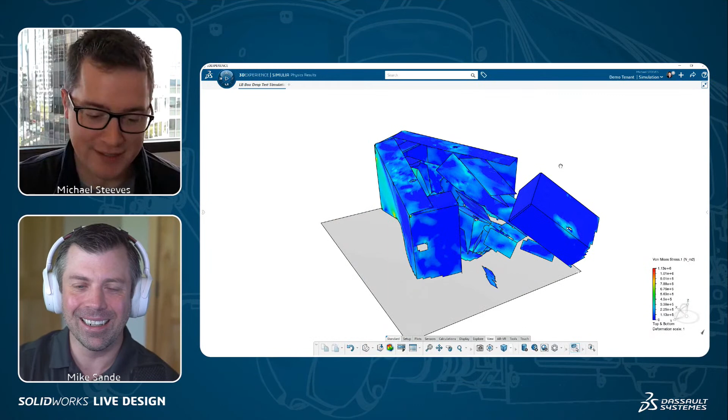I've got a little background on this one, but what are we looking at here? This looks like you do have some background, and I wanted to show this, just gonna play this. This is one of those things where it's like you set up something in simulation, you run it, and you're like, I didn't even know we could do that. I don't even know what's going on here. This is like, what is this, man.

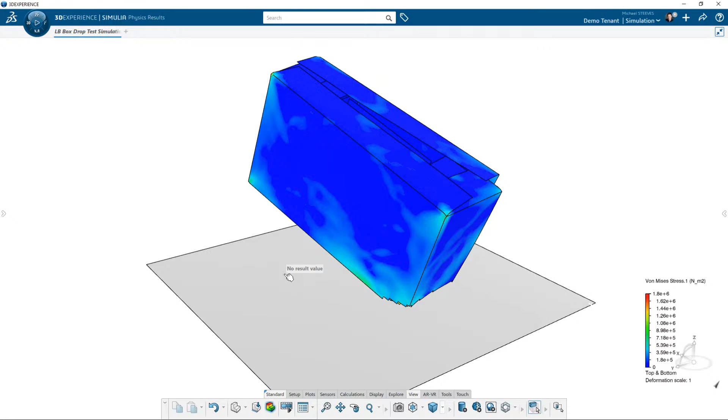Maybe we should rewind a little bit and unbox kind of what's going on here, because it is, it kind of looks like a box. It is a box. Maybe you saw in the thumbnail for this session, we've been working on this project, Lid Boss. I know, Mike, you and I have been working a lot on it. And as we start to get ready to tell that story, I thought, what a better opportunity than to come on to live design and do that technical deep dive and get into some of the underlying features, how we did what we did, what's displayed in like a 9-minute video for this advanced simulation. So that's kind of what I wanted to do with you today: take a look at having a SolidWorks model and getting it to the 3D Experience platform, do some real world simulation. What does that set up? What do those materials look like? Because it's a cardboard box.

Ooh, cardboard material properties, that's going to be interesting. I've had a lot of people ask about that over the years. And change happens, so design change. How do we have to recreate the simulation from scratch? Those are the kind of things that I'm hoping to talk about today.

Cool. Let's go back real quick and touch a little bit on the background of the product, because we might as well get the audience up to speed. So as Michael mentioned, over the last few months, us two and a few others here at Dassault at SolidWorks have been working with a customer, actually it's Center for Advanced Design. You've probably seen them on the splash screen, like the snowmobile was a big one. That one's been on a splash screen for like the last 5-6 releases. That's one of the designs that they did. They're out of my area. I live in Minnesota, just outside the west side of the Twin Cities, about a 45 minute drive. And we engaged with these guys because they actually spun off and created a new company called Lid Boss.

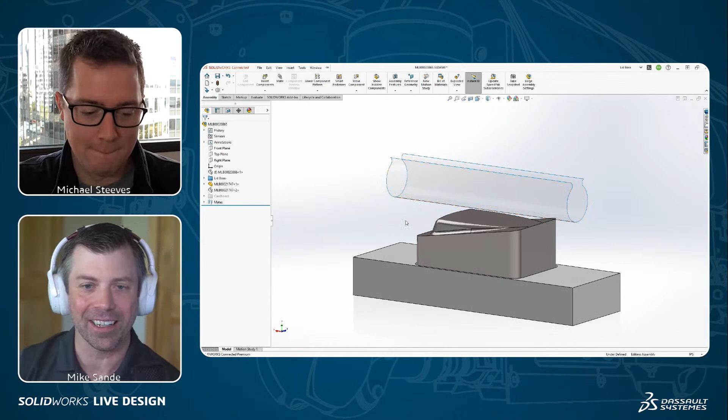So just kind of that a surface representing that outer shell of the LidBoss model, and the gravity tube. So that's the gravity tube, the lids go into that thing. It rotates 90 degrees, goes into the top, dispenses those lids. But yeah, this was the kind of initial packaging layout, if you will.

And so right now, I guess all these, to get this to a point where we're ready to run an advanced simulation, and one of the things when we talk about advanced, it's like, well, okay, in this case, drop test. A lot of contact, a lot of nonlinearities happening in a very short amount of time. So that's where, okay, Abaqus comes to mind. And Abaqus is actually the technology that we're using on the 3D Experience platform to do these advanced types of analyses.

So kind of one of the first steps that we can do is connect SolidWorks to the platform, and I'm sure a lot of you out there are probably using SolidWorks desktop, and you can easily connect it to the platform and leverage the wide range of roles and applications. So right now these files are local, but integrated into SolidWorks. We have the platform, and we can do that save.

So Michael, real quick, I want to point out, because I always thought this was cool, is doing packaging design in SolidWorks. And I don't know if there's anyone in the chat that's done this, but you can actually use the sheet metal functionality to create your flat pattern, right? So like that's what they did here, is go through, create the structure around the LidBoss. You have that overall box structure, and I've seen really cool examples where there's an AE that did like a full mask, an Iron Man mask.

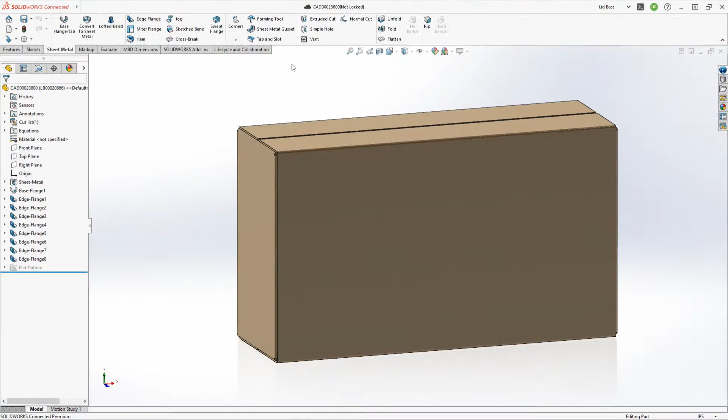Yeah, definitely. I mean, take a look here, because using sheet metal inside SolidWorks, it's in every version. We can generate that flat pattern, and there it is, right there for our box. Because yeah, that's definitely an interesting concept.

And now I'm inspired by what Jeremy did a presentation on live design. Oh, that's right. Yeah. Was it last year or 2 years ago? Man, these live designs are going by fast. Yeah, we have now built up quite a big library.

But Jeremy did a packaging presentation, showcasing how you can use the SolidWorks sheet metal features to do packaging design. Yeah, super cool.

So there it is. And yeah, with a couple clicks, it's right there. It's saved right to the platform. So what does that really mean? Well, instead of stored locally on my machine, it's now on the cloud. So I could go to another machine, open it from there. In addition to that, I can open it in a variety of other applications.

So like the simulation guys that you and I are, Mike, we have access to a variety of simulation tools. If it's structural analysis, fluids, plastic injection molding, and more. Electromagnetics is one. I think there's the story of the e-bike that has recently come out too that showcases it.

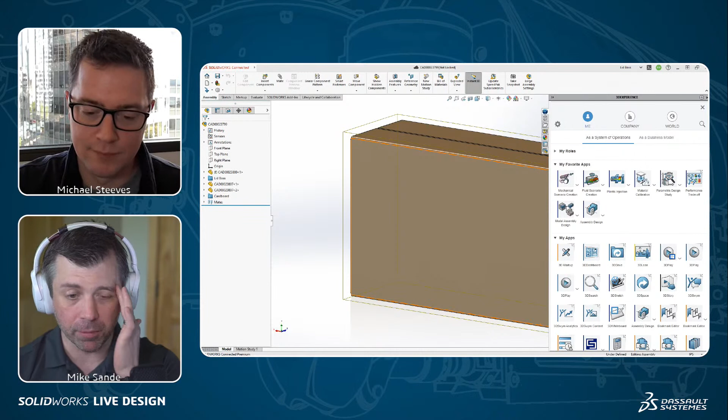Yeah, there's a lot here, and Michael, my background, I used to teach the simulation class for SolidWorks, so for the viewers out there who might be interested, we know we have SolidWorks Simulation available today in desktop. Why would I go up to use these Abaqus solvers? What's the big reason to jump to the next level? Yeah, so there's many reasons.

Just talking about the power of the cloud for the moment, with this, the level of collaboration we have is improved. I remember before I got into my first job in industry, I was shadowing one of the design engineers at one of the local aerospace companies here. I'm in Bellevue, Washington, at the moment, just outside Seattle. A lot of aerospace, as you might imagine. I was shadowing one of the engineers there, doing a design change based off of some simulation results.

And the reference he was using was just a couple pieces of printed out paper, a simulation report. I couldn't interpret it. It was my first glance at FEA results. I'm like, how do you know what to do and where and why? And so he had to do a lot of interpretation from these static images. So that's where this level of collaboration, leveraging the cloud, is definitely improved.

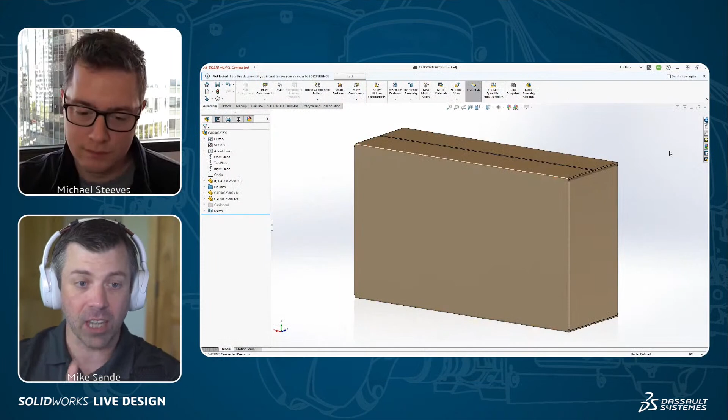All right, cool, man. Well, I'm excited to see the process here. You got it in SolidWorks CAD, right? We've got the design. The design's done here. We talked about that. We got the cardboard. We're leveraging that simplified assembly for those that aren't aware of some of the process in simulation.

But you try to find areas that you can simplify it. For the lid boss, we didn't need all the nitty-gritty detail. We just needed that mass, basically, and some of the geometry to reference. And now you're sending it up to the cloud? That's right. So now it's a part of the platform. So now I can easily access that data for the plethora of applications that are on there.

So actually, one thing that we just did here, let me just update this, because when I saved it up, I actually saved a couple extra components there. So I need to make a little design change and update it here. But one of the important things, especially for SolidWorks users, if you are taking your CAD model to any other analysis package: if it's SolidWorks Simulation, of course, it's integrated right into SolidWorks. But if you're going to Abaqus or something else, sometimes you have to do an import process.

Not here. We're going to a separate application, however, since it's all on a unified platform, we just open it up and there it is. So it's super easy to open up in these other applications. I guess that's one of the other benefits of the platform: there's no conversion that you're having to do as a user. Yeah. So me in Minnesota, you in Bellevue, Washington, I could be working in the design real time, and you could just start cranking on a simulation on your end. No email, no nothing, huh?

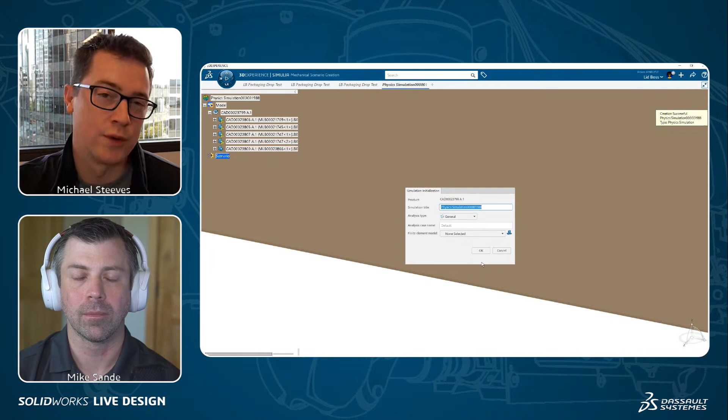That's right. That's awesome. You think of social media or other collaboration tools where you can @mention people, call them out on that platform. It does the same thing here. So, yeah, and it's integrated with SolidWorks. So launching it right from there gets you going. As you can see here, I've got a couple revisions that we'll be taking a look at. And I should clarify, the simulation tools that we're running here are locally installed, just like SolidWorks. I mentioned being able to solve on the cloud. Of course, you can solve locally. But again, if we take a look here, there's the same SolidWorks geometry right in there.

So one of the first questions is, how can I create, like we're doing a drop test here. I think we're talking to Mark and Jesse at Lid Boss. If you're going to ship your product around the world, how are you going to validate that packaging? Well, you could send it out to some of these independent packaging validation places that perform these batteries of tests. But the question is, how can I make the initial design better before we get to production? Same question applies to packaging.

Yeah, so a little backstory on that: once they had their packaging pretty well set, they paid a good chunk of money to get this thing shipped all over the place, to and from East and West Coast, up and around and down. So you've got not days, but weeks and weeks of physical data of this thing being shipped around via different shipping methods to get that data back to then analyze it. So a lot of money and especially a lot of time. And remember, COVID just happened. They released their product. They didn't really have that. So being able to validate it virtually, there's a big benefit there.

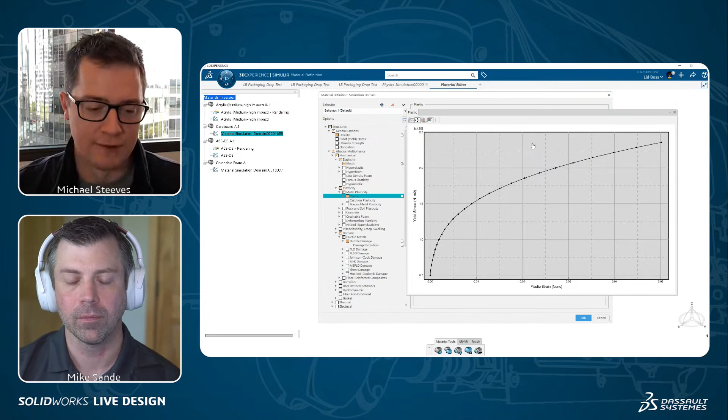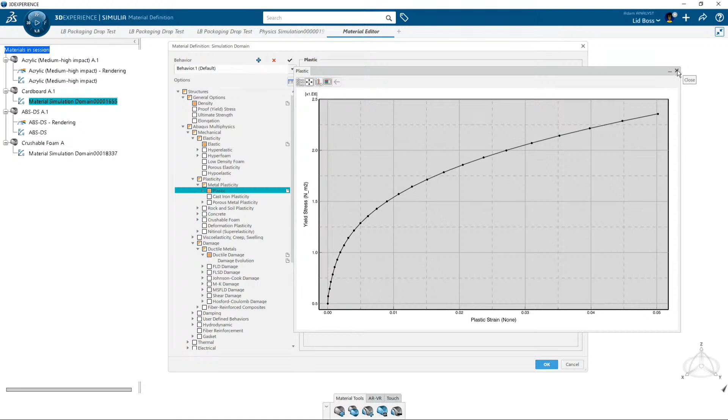So what I've done here is I do have a kind of simplified material model to represent that cardboard in the two directions. And as you can see here, we're representing that nonlinearity of the plasticity of the cardboard. There's a ton of different material models in here. I know some of the capabilities in the desktop stuff, but yes, like hyperfoam, wow.

Yeah, so you can see, of creating a material definition here, on the left-hand side there's a lot of different things that we can do inside structures and the multiphysics of Abaqus. And the ones that have that little orange dot, those are the ones that we're using. So of course we need properties like density. Here's our elastic property here for our different directions of the material.

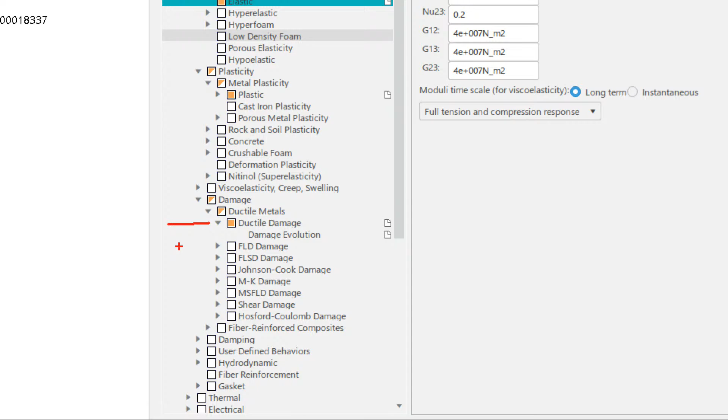There's that plasticity, and here's our culprit here of how we were able to have that first simulation we looked at blow apart, disconnect, elements are dying: it's damage. Wow. So we have some damage enabled here to account for that element death. So in Abaqus, you can actually figure out when stuff completely fails. Is that accurate to say? Right. So we have a fracture strain that's defined here to account for that.

Yeah. And this is something where you do physical testing, you do some correlation with the data to account for that and bring in these different material models. Again, like what I mentioned here, this one's a simplified model, but one cardboard material doesn't apply to the various types of corrugated cardboard that we were talking about a minute ago.

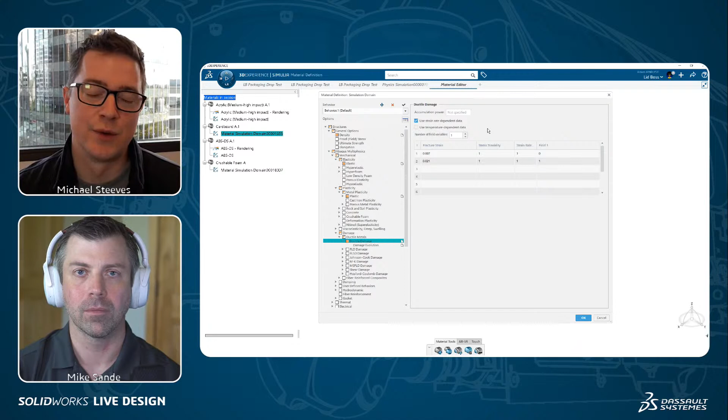So yeah, that's where you could have multiple materials, and you could toggle between. That's part of the design process. Well, you could change the geometry, but what about the material? So you could switch between different cardboards to see which one is going to work best in your case. Really cool. Really cool.

Yeah, so for those in the audience that are familiar with the desktop simulation, in just static analysis where your stress-strain is linear, so you hear about linear statics, we're really analyzing the deformation that happens in that line. Outside of that line becomes a nonlinear type of deformation. There's your stress-strain curve right there. And SolidWorks can do that. There's a nonlinear solver there, but it's a little bit more limited.

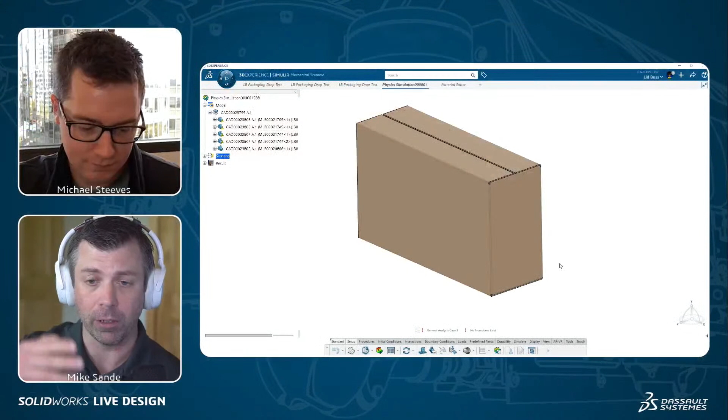Once you get into these, you can see what Michael's got up here, all these different ways we can validate different materials. And we all know, in today's technology, we're constantly creating new materials or new ways to manufacture materials. That adds a lot of complexity. This is where having the power of the Abaqus solver, you can really fine tune and create those different materials and solve all the way through into failure. So that's huge to a sim geek, that material model is really powerful.

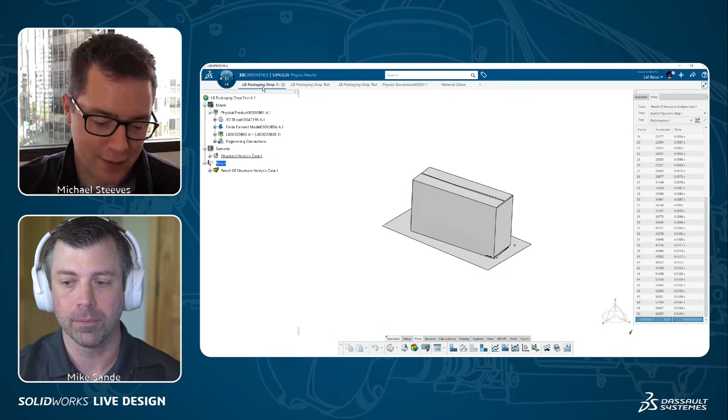So maybe I'm going to fast forward here a little bit and take a look at one that I have set up here for this first iteration. So one question that does come up is the different types of scenarios or procedures that you can create, and this capability keeps expanding every release. So down here, if we look at the bottom, when we set up an analysis case, we have our procedures, and we can do things like you mentioned in SolidWorks Simulation and desktop. We can do linear statics.

We can do buckling. One thing that's unique here is we can do the Riks buckling analysis step. We can do different static perturbations. Then we get into our dynamics, so implicit dynamics, which is the type of approach we use for our nonlinear capabilities in SolidWorks Simulation. But then we get into the explicit dynamics, and we get a little bit of explicit in SolidWorks Simulation with the drop test study.

You think, oh, maybe that's where we can accomplish a situation like this. But again, once we get into kind of the more advanced materials, that's where we would really differentiate here using these roles here on the platform.

Hey, Michael, we got a question. I don't know if you can answer this one. I know you worked with the Simulia team on the material model, but Ken's got a question. Are you using ECT or Mullen on your test for the corrugated? Ooh, I don't know that off the top of my head. We'll come back to that one.

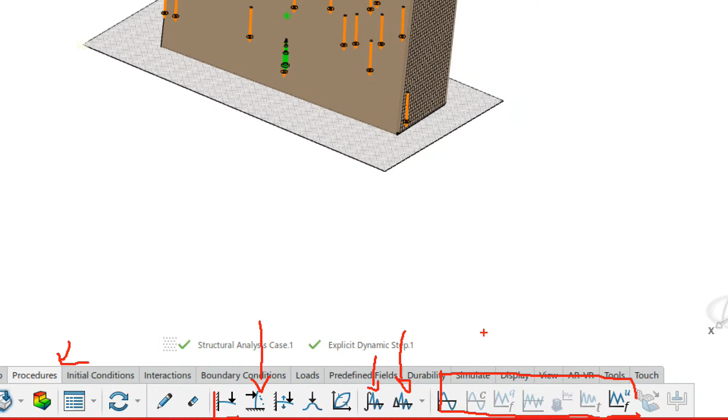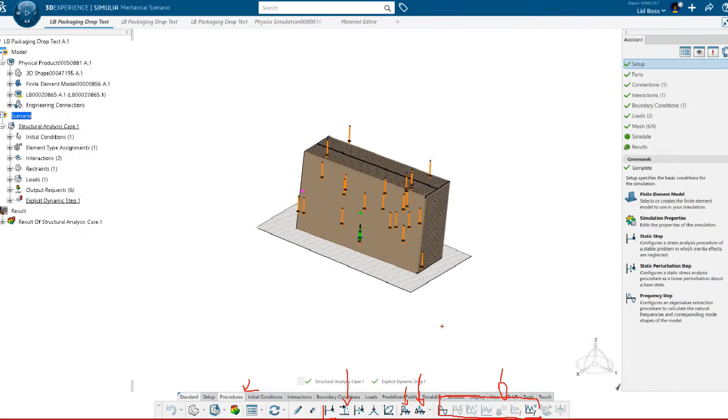Right, so if you're braking on your car and you've got that brake squeal, there's harmonics that are going on there, but there's also contact that's happening. So being able to quickly analyze that type of phenomena is capable with the complex frequency. And most recently added here is our response spectrum analysis. Cool. So the types of studies that we're doing here keep on expanding. And of course, if there isn't something there now, let us know. We'd be happy to work on getting it in there.

So it all goes back to, we all know failure happens in engineering, and I love the saying, fail early, fail often, right? We want to try to virtualize those failures before it goes into production, before it goes to market, before you're shipping 100,000 units all over the world, right? And failure is not always just that linear statics failure. It's not always just the metal has yielded. You've got almost a half dozen different ways to look at it.

So keep that in mind as you're designing, what type of physical outside real world conditions are happening to your product when they're in use, and can you virtually validate all the way through beyond just that static failure that we're all pretty well familiarized with. That's really cool. That's a lot of different ways we can analyze.

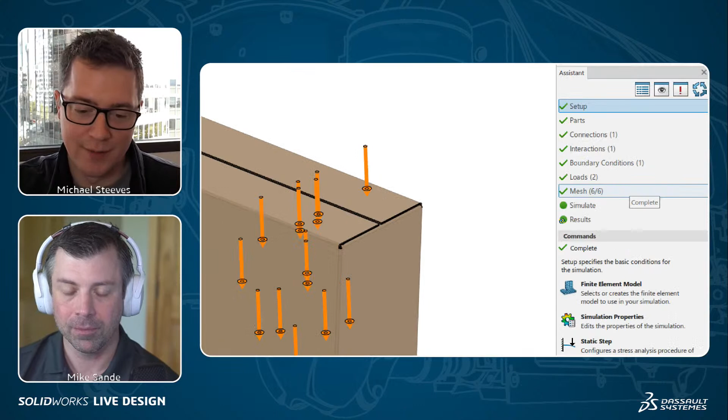So let's talk about the setup a little bit. The setup here wasn't too complex, and actually to help walk along here, we do have an assistant that's built in to walk us through setup, defining the parts, connections, and mesh. Last year when we did our other project, Mike, with the shredder, in that episode of Live Design, we did get into some of the meshing techniques, so I'd invite people to go back and watch that one. I want to talk a little bit more about this explicit study and the setup here.

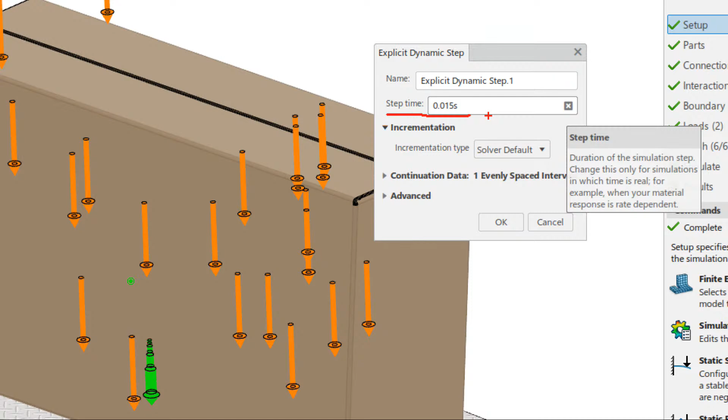So when we define that procedure there at the bottom, we can specify how long we want to solve. And as you can see, it's a small fraction of a second that we're accounting for. So you may think, oh, how do I set this up? Do I have to move the model up above, account for the amount of time it takes to drop down? And the answer is no. As you can see here, the initial condition or the model placement is where that box is about to hit the floor.

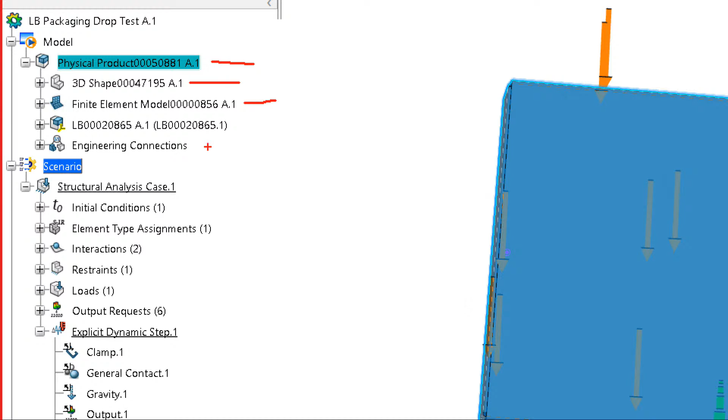And that's actually something where we have access to additional applications. I could set up that geometry right inside SolidWorks, but we didn't. We actually pulled that final package in and inserted it into a new, what we call a new physical product, which is right there. We modeled in a floor. There's our mesh represented there. We'll leave that aside for now. And there's that SolidWorks model. So we're able to combine both SolidWorks and CATIA to generate the geometry and perform the setup.

So a question came in here too on, can we also view, and I know we'll get to results, but view the accurate deformations?

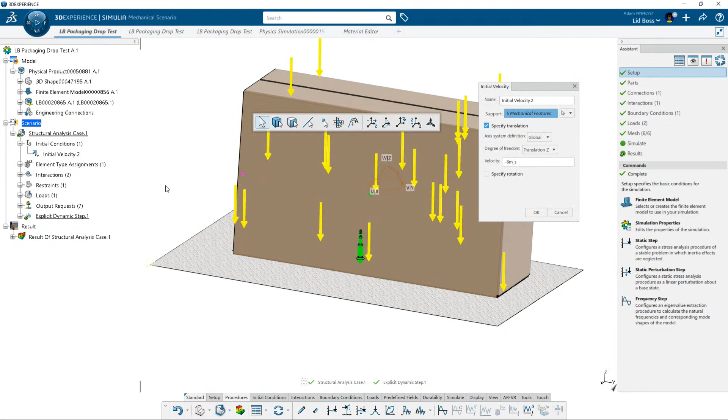Yes. Yeah, let's take a look. We'll come back to that in a little bit, I think. Awesome. Okay. So just to step through here, we have an initial velocity, 6 meters per second, headed down. We have it applied to all those bodies.

For interactions, I've talked about this many times, but when it comes to interactions, we just specify a contact property, like what's the friction that's here. There's plenty of internet memes, especially engineering memes, like when the physics professor tells you to ignore friction, like, oh, the problem's super easy, but it's not realistic. Friction is definitely in the real world, but we apply that with just a property here.

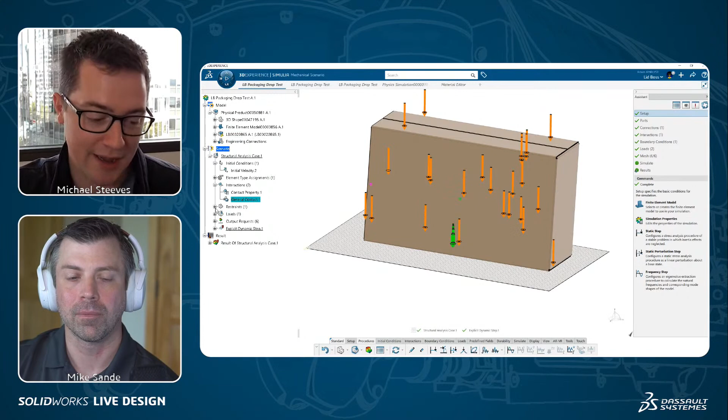You can individually assign it to different regions if necessary, but I have it globally defined here. It's part of a general contact overall. It's applied to all surfaces, so everything that comes in contact is automatically recognized. This is one of the other big benefits of using these roles on the platform compared to other tools: contact detection is amazing and automatic. From here, we have a clamp that's applied to the floor.

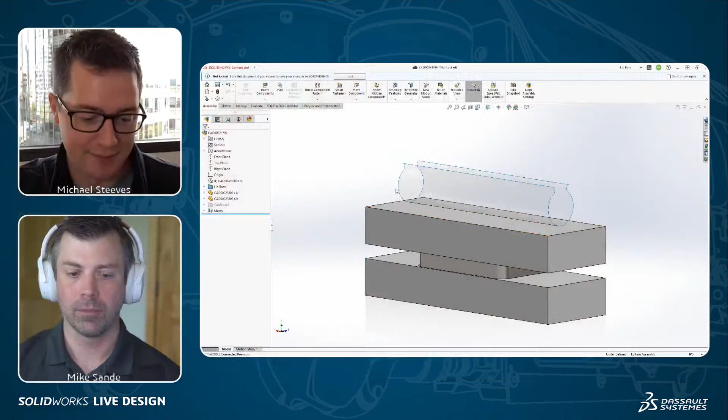Questions coming in. Martin is asking, is this SolidWorks Premium? And the follow-up question is, where are you performing these analyses? I think you may have missed that intro part. So just to refresh on the data workflow here, the process. Yep. So the CAD model is coming from SolidWorks. There's our initial cardboard packaging design.

That is being saved onto 3DEXPERIENCE and then opened in one of our roles, or one of our apps. So this is the Mechanical Scenario app that we're looking at right now, part of the Durability and Mechanics Engineer role, which is a collection of these apps. If we take a look at some of the other tools in here, to create that assembly I was using Assembly Designer, and to do that material definition we talked about earlier, there's that app. Here's our scenario creation. And you can see there's a variety of other tools here to help perform those different tasks to perform the simulation.

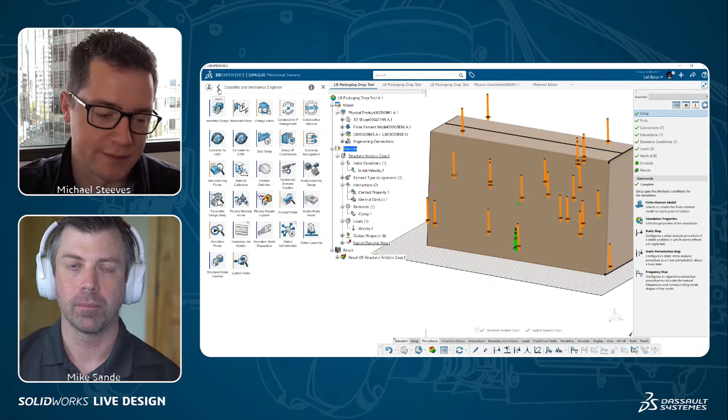And now these apps here, on the platform we offer full cloud-based apps, like you've heard of xDesign or xShape, which are browser-based modeling applications. This one you're working with, though, still has an installation. Is that correct? That's right. Yep. These are what we call native apps. They're installed on your Windows machine.

But one thing with the results, when we do that post-processing, and we can get there in a little bit, is those can be shared and viewed right from your web browser. Cool. Yeah, from your phone, or even integrated right into SolidWorks. So if you share those results back to the designer, you can have those results right in that right-hand pane to help drive those changes that you're going to make in SolidWorks.

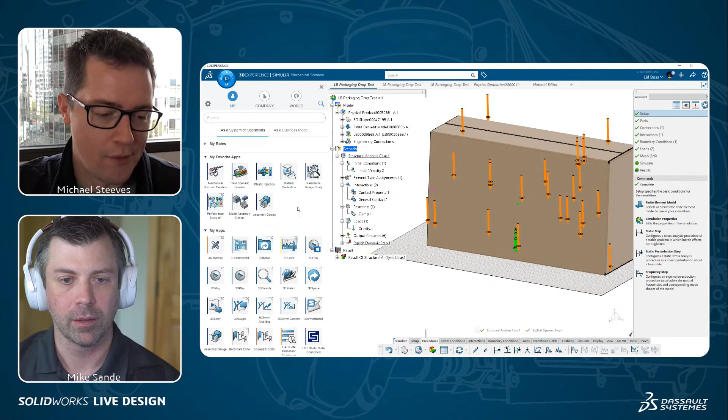All right, so we've talked a little bit about the data on the model side. Now into the scenario, we added some friction, right? We added friction. Yep. We added a clamp to hold the floor. We added gravity to everything. And then maybe let's talk about solving a little bit here. When I submit these jobs to solve, you can choose. You can solve it locally on your machine because it is a locally installed client, or you can send it up to the cloud.

Now, what's really powerful about these roles is the capability to solve on the cloud is available to you at no additional cost. So if I'm submitting this job, I can choose however many cores I want, and I've solved this on this laptop here. It's 6 cores. Of course, it's hyper-threaded, but we're solving on the discrete cores, so I can choose up to 6 on this machine. No additional tokens or credits are consumed here, so I can do that locally. Or, as the other option, I can choose to solve it on the cloud.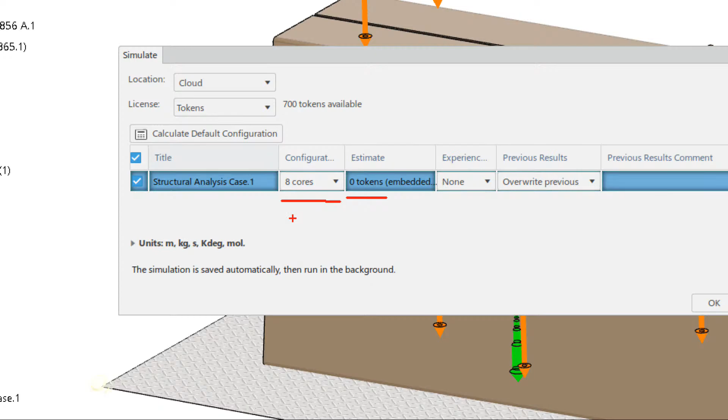And like I mentioned, with the Structural Mechanics Engineer role here, 8 cores is included, so it's not consuming any additional tokens or credits. However, you can purchase additional tokens and credits so that when we're solving on the cloud, we can go up to 18, 36, or even 144 cores. Whoa, that's a big machine. So that's part of the power of the cloud, that high performance computation. So actually, I had this question come up of, why 4, why 8, why 18, why 36? It's like, well, what if I wanted 50? Did I do 50?

So yeah, a couple things there. With 4 and 8, these are the levels that are included. We have different roles available depending on the type of analysis work that you do. Depending on that role, the capability of 4 cores or 8 cores are included. So that's where the 4 and 8 come from.

But from there, the logic behind 18, 36, and 144, it's coming from what we're solving, what type of structural scenarios, what type of fluid scenarios, plastics, etc.

And what development did is found a balance to optimize the best core options, and also, when you run it on the cloud, what cloud resources are you using? Because as you imagine, the cloud isn't free. If you wanted to spin something up on AWS or something, you can pay to use that piece. But when you go consume that resource, you have to say how many processors do I want on that virtual machine, on that cloud machine?

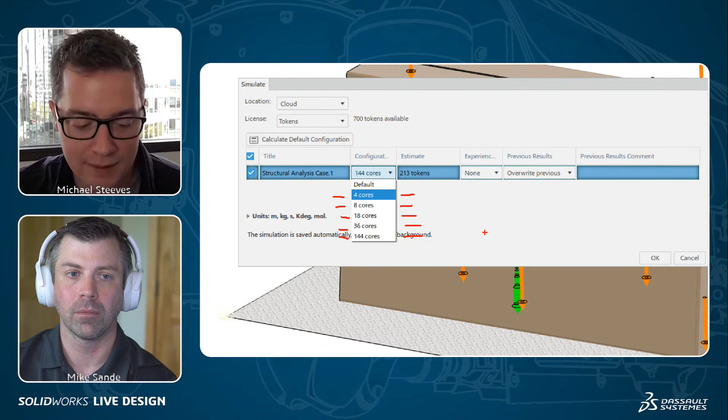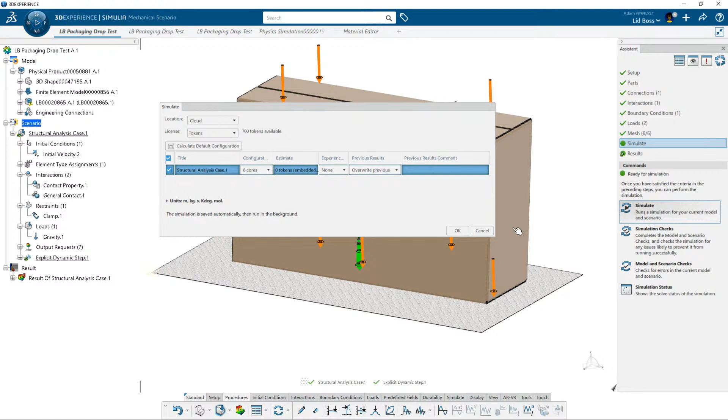And when we submit these jobs, actually solving this study on 144 cores took about 20 minutes to solve, compared to locally. When I ran it on 6 cores locally, it takes about 60 minutes. Okay, which was still not bad at all. That's a lunch, right? It's a lunch, yeah.

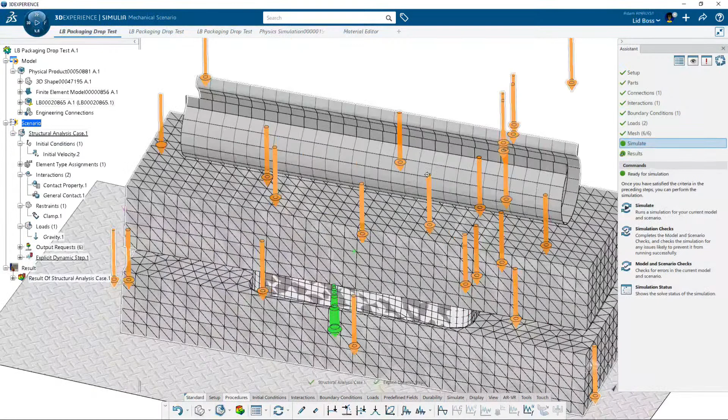And you can think, we did a lot of simplification in this model that we took a look at earlier. We're missing a lot of these smaller features in the model. The entire gravity tube is just simplified with a surface extrusion. But you could throw more geometry, more complexity out there, and leverage the power of the cloud to do it.

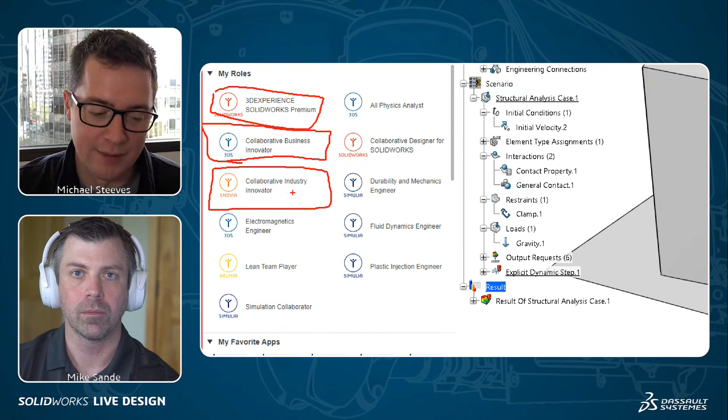So there we go. What we've shown earlier is we've got 3D Experience SolidWorks, that's where we made the model. The other option there is collaborative designer for SolidWorks, that connects SolidWorks desktop to the platform. Here's our collaborative business innovator, so this is where we get our dashboards and more. Once we get into storing cloud data, the SolidWorks data on the cloud, this is where we use one of our prerequisites, collaborative industry innovator.

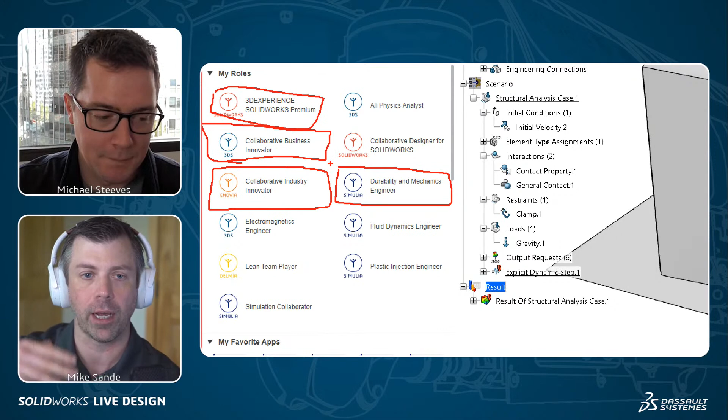So is it included? No, it's an additional role, what we're doing here to set up this simulation. Yeah, so essentially if we were to include it on that basic one, that cost of entry would go up. We really want to make it so if you're doing design work, you have a design role specific to what designers are needing. If you're doing more simulation stuff, you can add that role in as needed. It's going to come with all the apps that you need that Michael showed, like that material definition app becomes available to you, that you don't necessarily need if you're doing more of just design type work.

So when you look at the 3D Experience platform and you look at what you do, whether it's a workflow or an industry that you're working in, we have roles very specifically curated for your work. So you're not getting more than you need, but you can add those on as needed, and they become available to you right away, right through the browser. You can start to launch or install to be able to tackle those challenges.

Another question for you, let us know if you have more questions on that. Will these features be added to the offline SolidWorks program, or is this only accessible on the online service?

I think this gets into looking at what's available today with the desktop simulation tools, and as we kind of level up to the Abaqus type solvers, do you think we'll ever see this? Yeah, these roles that we're showing here, leveraging the power of the cloud, submitting it to run online. This is all part of 3D Experience on cloud.

One thing to keep in mind is the simulation tools available in the desktop apps are really focused and honed in on that early design process, how to make those decisions when you're in that if-then scenario. As you get further down the development cycle and complexity gets more involved, your decisions come a little bit more costly to making a bad or a good one. This is where you're going to want to go into these very powerful solvers that not everyone needs. The desktop simulation tools, we see a need for any designer or engineer to use in that early phase. But as we progress, the answer to the question is we probably won't ever see, and I can't say never, this level of solving in the desktop app, because we have great tools available today for that design aspect of it.

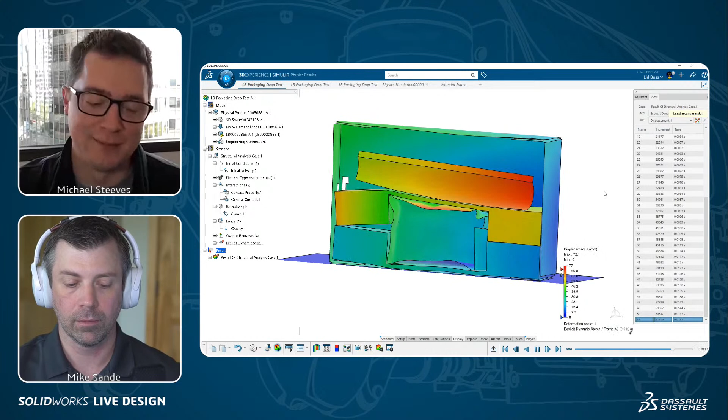But I think for our time today, I'll have to have everyone go to the videos when they're available to watch. Right, pretty pictures, and there's a displacement graph there, but yeah, the accelerometers, you guys have to check out the videos again. That'll be available next Monday, the microsite and emails will be coming through. That's where the good data, the fun stuff to really start to analyze, comes in.

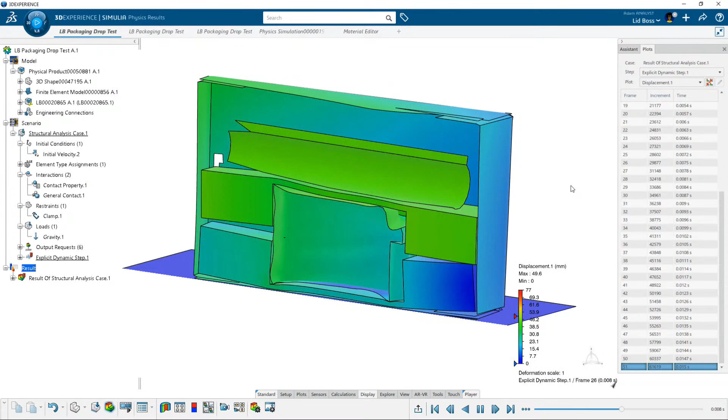I think one thing we see here is, oh well, it could be performing okay. That gravity tube is unconstrained, it's able to move around there a lot. And we did only solve this for the initial collision of what's going on here, but there's so much happening in such a short amount of time. So I think really going back to, okay, let's come up with the initial design, let's do a virtual test and set that up.

And of course, change is bound to happen. I think the story with LidBoss and the change they had to make was they shipped out their initial package to a restaurant, and they opened it up, and what did they see? They saw the styrofoam foam. They saw the foam and said, no go, we can't have foam in the food industry.

Yeah, so the NSF standards, the food and safety standards in packaging. Kind of a fun fact: if you're ever doing packaging design for food, you cannot have foam. It has to be cardboard only and plastic wrap. Plastic they can include in there as well, but no foam.

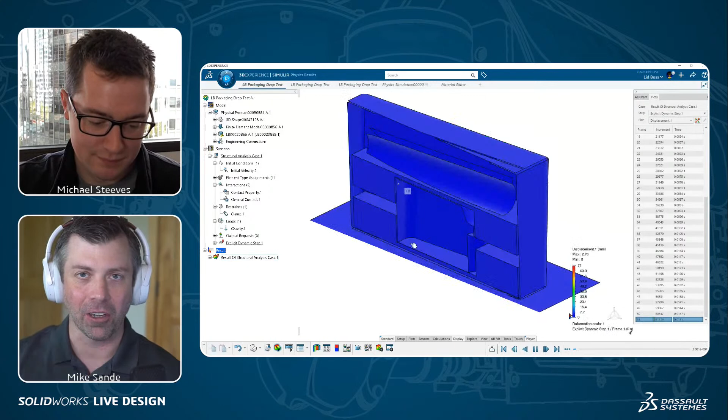Right, so quick change - maybe you've used foam before. What do you think about for impact? Think of a car's bumper, ever take the rear bumper off a car? They have super high density foams in there because foams do an extremely good job at crunching during those impacts. So why wouldn't you want to use foam in a drop test in a box like this? But you can't, that's why.

So they had to resort to an all cardboard design. Maybe we'll use that one we created earlier. This wasn't fully set up by any means, but it does show the foundations. There's our physics simulation at the top, we've got our CAD model. This is where we create the scenario and results and do our post-processing. But I think just to keep this simple, let's just focus on this CAD structure here.

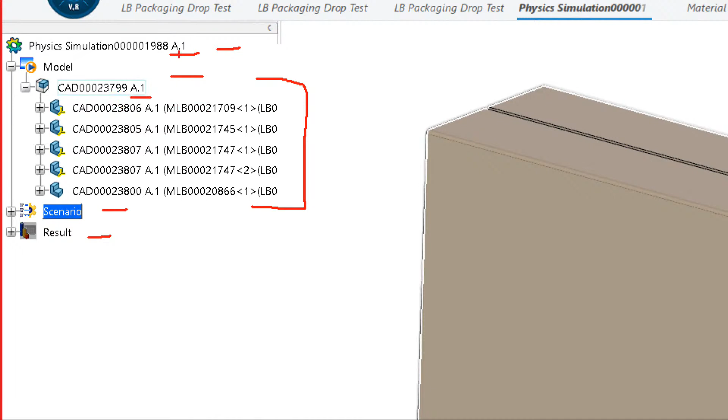And because we're saving onto the platform, revision control and revision management is built in. Everything's saved at this A1. So let's just talk about what it looks like to do this revision change and go through that process.

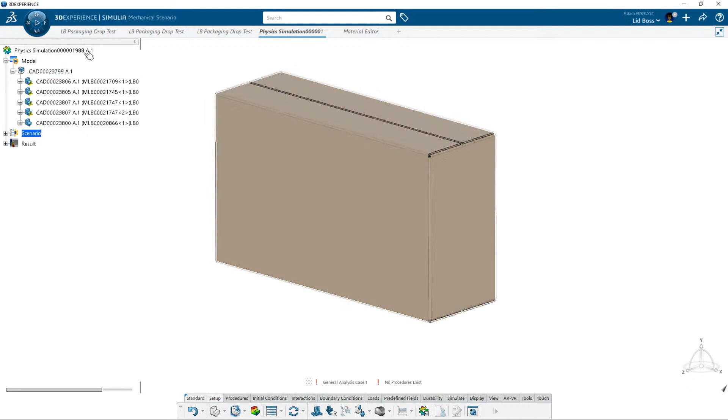So I need your help, Mike. Help me remember the structure here. So we've got this 1988, that's the physics simulation of interest. We want to revise that and the component inside. But actually, I really only need to remember one object here, that physics simulation, that 1988.

Let's just take a look at all of our simulation objects that contain that 1988. There it is. And right on the platform here, you can see there's other filtering on the left, and other properties on the right to help me understand what I'm working on here.

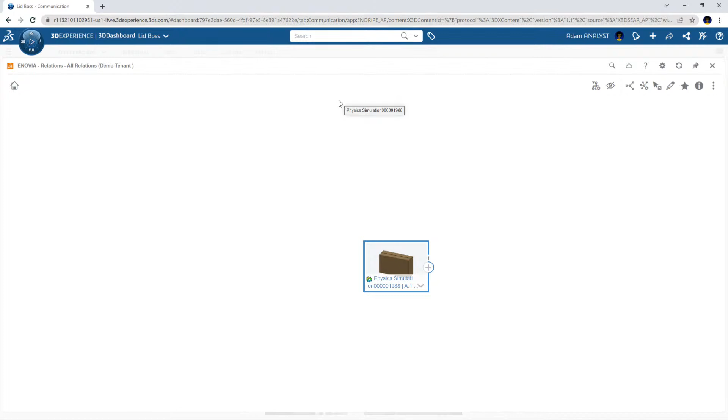But the change I want to make here is we're going to revise it, right? So why would we revise? Well, obviously we'll want to keep maybe what was released or the previous iteration so we can do that comparison to help validate the change that we made. We can also preserve all the work that went into that simulation setup, so you don't have to lose previous work that you've done.

Gotcha. So in this case here, we want to do this revision, taking a look at all the relations here so we can continue to branch this out. Cool, as we may see, there's our physics simulation. It contains that CAD model, all the components inside.

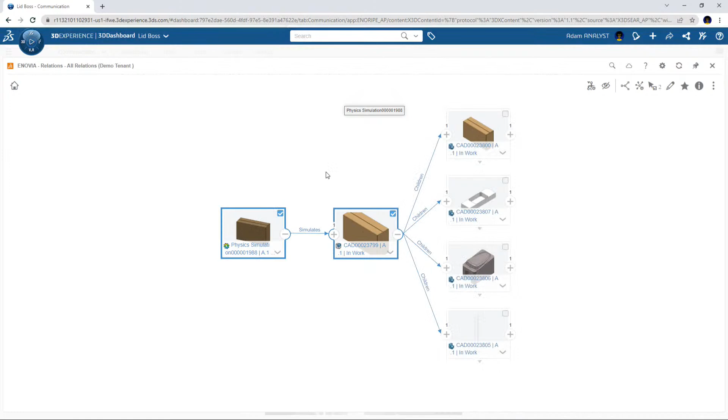So for the SolidWorks users that may have dabbled in Treehouse, yes, Treehouse was a really cool project, still around. It gives a nice visual layout of your top level assembly, sub-assemblies, any affected components in there or reference components. This is a really cool way to visualize that, and you're doing it from a simulation, that top level.

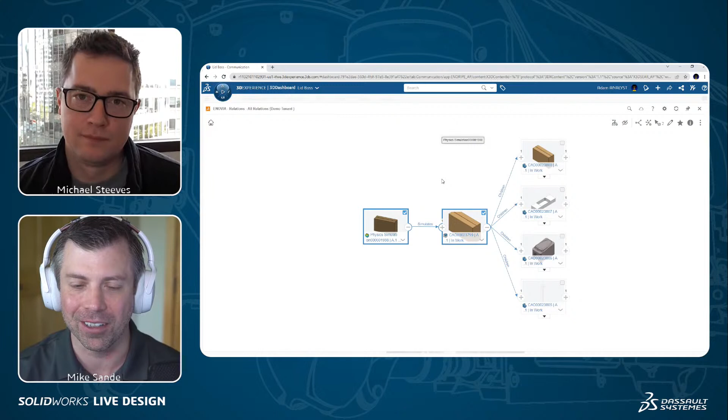Right, and now we're seeing the CAD files and all of the subsequent parts in that. That's really cool. Everything on the platform has these relations, we can visualize them. So it's definitely more than just the design data.

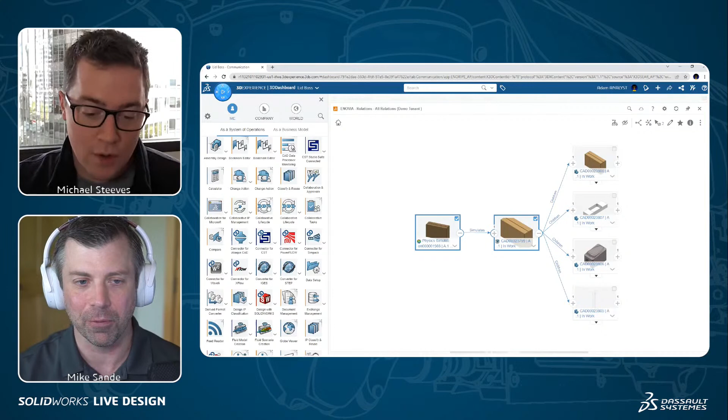Yeah, so this would be neat too. Like if I wanted to make a change to the foam model, or maybe one of the packaging structures, I'm guessing that would show me if it's used anywhere else. If it's reused in another assembly, we can't just dive into making changes if it's released elsewhere. And you would, right, validate that.

And I can validate that. Sure enough, this cardboard box, for instance, it's only used in one location. Cool, so here it is. But if it was used in other assemblies, or if that foam model was used elsewhere, that number would be higher, and we could see where else that is branched out and used.

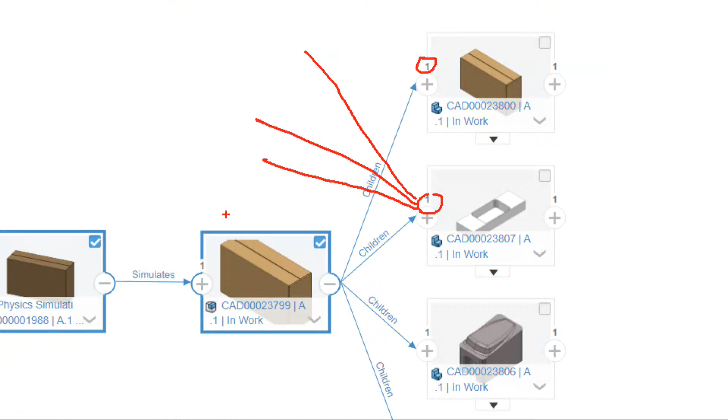So I could say, I'm going to make a change here. Yes, it's only limited to here. I don't have to worry about what other things this may impact.

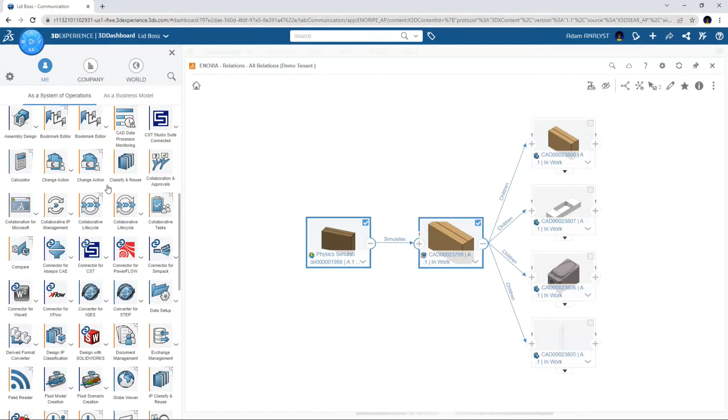All right, so let's do a revision of that physics simulation and of that CAD model. So from that relations, I can select both objects, and we launch our collaborative lifecycle app, which is what we use here. So this does a couple things.

This is where we can go to delete data. We can go to release it. So we do have definitely some lifecycles here. And also revise them, and I can revise them together. So that does a couple things for us.

So we could put in a comment here, our cardboard-only version, so we're creating this revision. This is also interesting because if you've used SolidWorks PDM or some of these other data management tools, you can have some of that capability right inside SolidWorks.

And sure enough, we do, with the platform in SolidWorks as well. But because we're managing data from different applications, we have one app to bring it back together, so I can perform that revision process on multiple types of data that are connected.

Hey, we got a question from Sean O'Neill. You pulled up that sim result just by that prefix of sim, is that really how easy it is to just take a look? Yeah, so there's tons of types of content that you can bring in here, and if you are a 3D Experience user now, take a look at this.

Or if you're not, one of the pro tips is if you hit this little drop down here in the search, you can go to Help on Type Shortcuts. That gives you a list of all the different types of objects that we can have in here. So like the object that we were interested in, it's a physics simulation object, and you can see it there in that collaborative management. So if I just type physics, there it is, physics simulation.

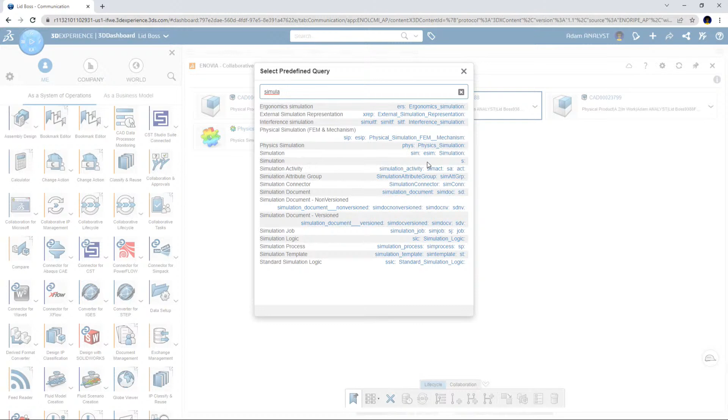So one other type is just do phys or physics simulation. Okay, so it's a handy tip. Type simulation. There's ergonomic simulation. There's my physics simulation. There's simulation jobs for submitting a simulation job to run on the cloud. There's our simulation, sim. Looks like I could have just used S as well. So yeah, great type shortcuts to just easily filter your search right away.

All right, so there's our new revision, our A.2. And if I take a look at the relations of this one, we can see there, sure enough, there it is. And here's the big question: is it attached to the A.2 of the CAD model? And sure enough, it is. So that's cool.

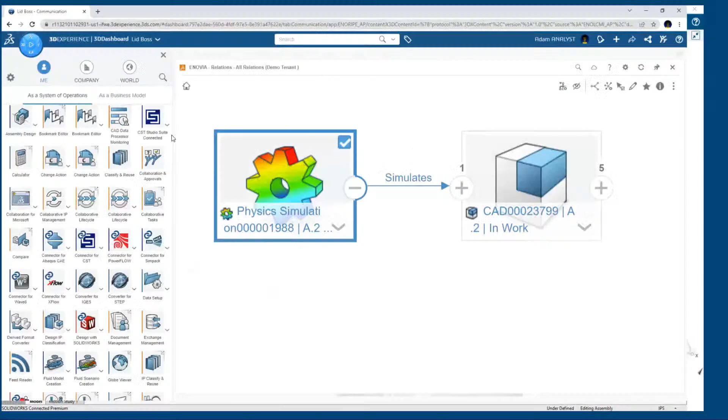Michael, got one more question from Ken, another good material definition question. He's wondering about the corrugated direction. I know we're using a simplified model. Are you able to do those isotropic or orthotropic type direction definitions? Yes, of course. We didn't get into it today, but when you define the properties for those components and select the material associated there, it does have orientation directions. Cool. And if you rewind back to when we had the material model up there with the plasticity or the elastic material property, it had the 3 different directions there.

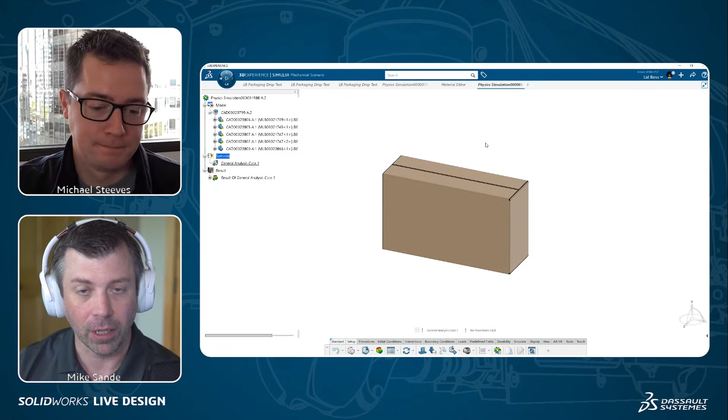Yeah, so it's very similar to a composite. Essentially, cardboard is a composite by definition, and you can define those different strengths in X, Y, and Z. We have a lot of customers that work in composites that heavily use Abaqus solvers to figure out the optimal orientation, because sometimes you want a lot of flex in one direction and maybe not so much in the other. So yeah, you can definitely define all those. Ken, another awesome question. Thanks for chiming in.

Okay, so taking you back in here to wrap up this revision sub story, we can see that we have it opened up in our mechanical scenario app. There's our A.2. We're able to keep going on some of the work here, but our geometry hasn't changed, because we haven't made that change inside SolidWorks.

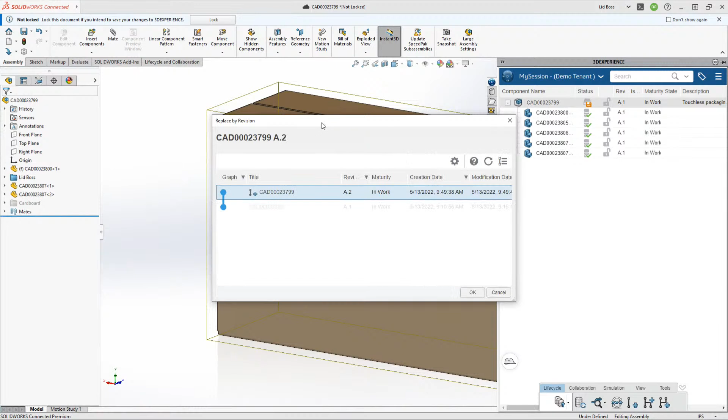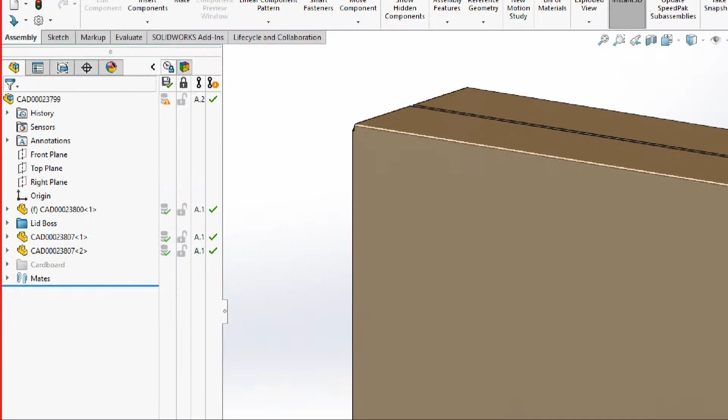So let's jump back here to SolidWorks, and we can grab the latest version of this model. So there it is. I can get that latest revision right from the cloud and pull it down into SolidWorks. And we'll see that, sure enough, our tree is updated with that A.2. We can see that verification on the left-hand side as well. This was one of the recent enhancements in SolidWorks Connected, having this built into the feature tree, with feedback of what's happening on the platform.

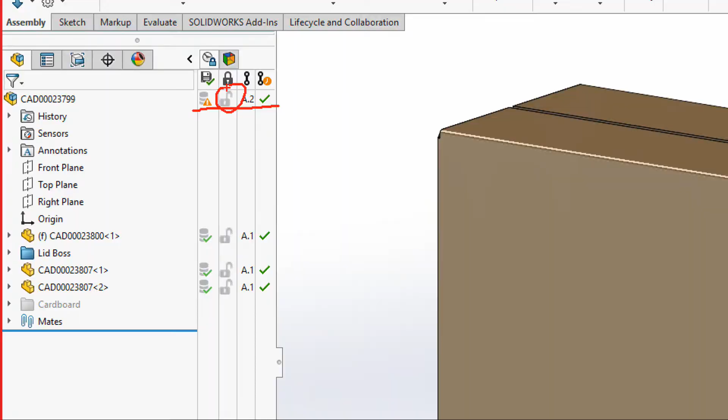So I'm seeing we've got A.2. The green check, what does that mean? Latest version. That's important. What about the little lock symbol? I'm guessing ownership. So right now it is not locked to me. We will make that change here, but let's go ahead and add the change. We're going to add some of these cardboard components. Let me hide this so you can see some of the changes.

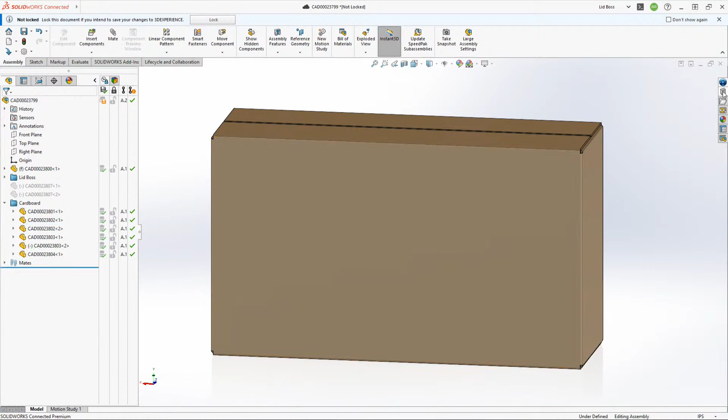Actually, let's do this. We need to remove these. Let's just suppress them and add in the other cardboard components. There they are. So you can see a number of things that are added here. We've got some W's, a V, to build this thing up and add some rigidity. And we can see, sure enough, on the right-hand side, the platform's aware. When we make our change, we have additional components and we've removed some components. Let's go ahead and save our changes.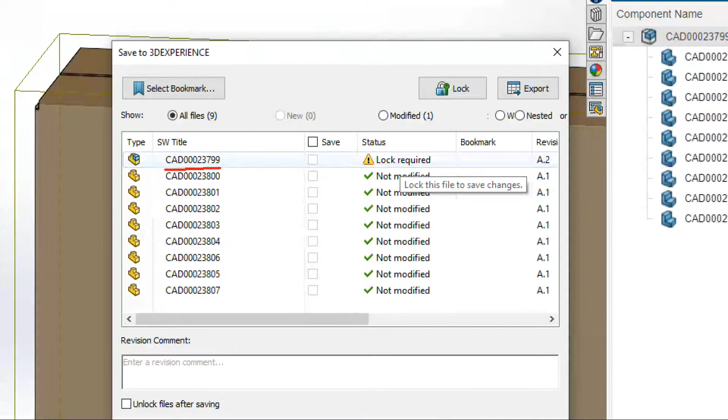And sure enough, it's actually prompting me: you're trying to make a change to this model. It's not locked, but in order to make that save, you need to lock it. Well, I forgot to. However, I can just easily lock it right from here, so that I'm telling everyone on our design team, I'm making the change. I'm submitting this change to the model.

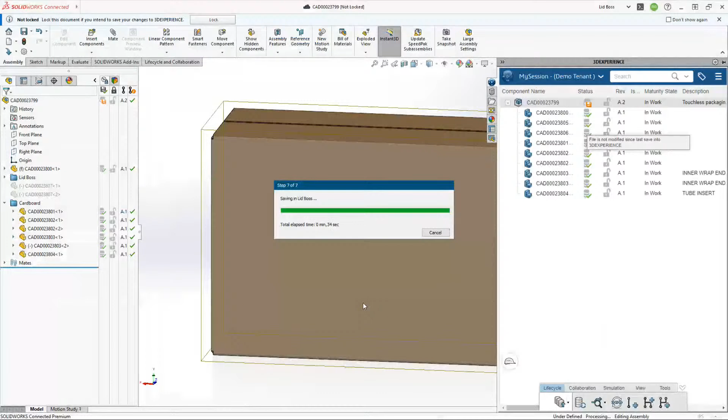And after I'm done, I can unlock it. So if anyone else wants to make changes, they can reserve it and lock it for their use. That's a great way to use something as reference and build up your assemblies without accidentally changing what's stored and what everyone else is collaborating with.

Now, okay, so let's switch back to that A2 simulation, because here we go, right? The model hasn't changed here, so we're out of sync. So to make sure we're in sync, I could close and reopen everything, and that'll pull in the updated model. Or we can do something we call a global refresh. So it's taking a look at what's in session, what's open now, and what's on the server, what's on the cloud. Sure enough, it recognizes that, nope, it's out of date.

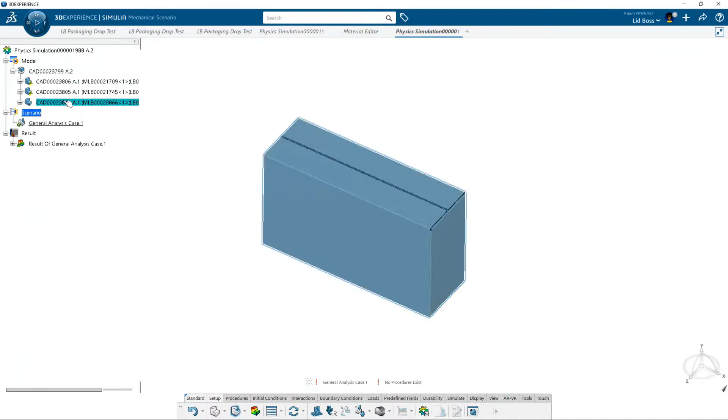So let's perform that refresh. So it performs that update. And it looks like, we'll do that one more time, because when we add new components, we talked about how you don't have to do any conversions manually as a user, but it is doing those modifications up on the cloud. So there's those, and we can pull those changes down. Sure enough, yeah, we've got all those additional cardboard components in there.

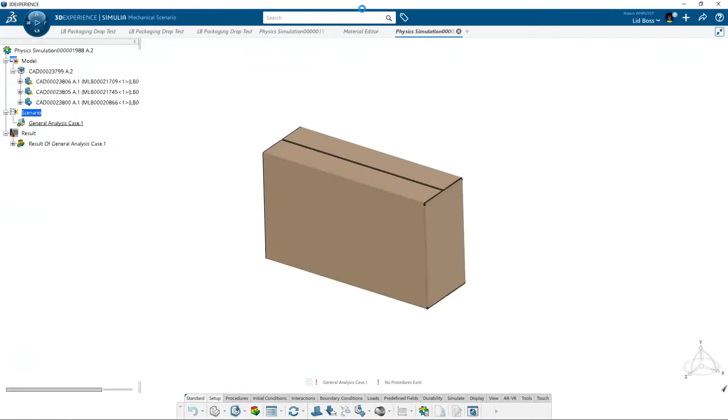So, Michael, we've got about 3 minutes left till the top of the hour here. But one thing, we've seen the update in design, and we know revisions will happen. They're going to happen, especially as you're getting that feedback loop. You're doing your simulation, you're getting information, it goes back to the design. We can really start to fail early, fail often to get that optimal design. What about all of the loading and the clamps and the accelerations and everything that you went through? Do we have to go through that process again on this new revision?

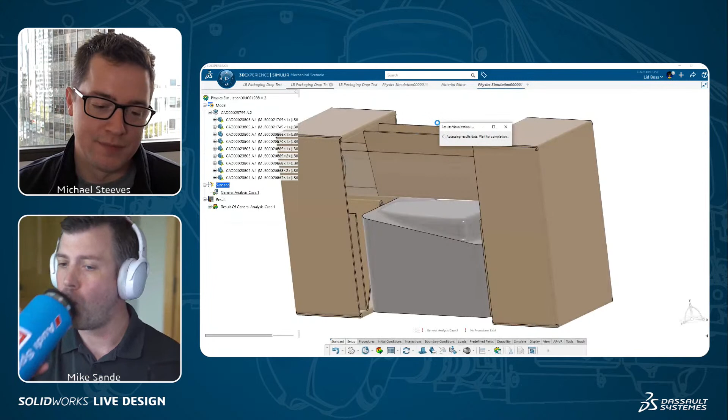No, all that's maintained. So as you can see here, we have the updated geometry from our A2 performing that update. So let me switch back over here to our A.2 results, because at a basic level, the only thing that needs to be updated is the mesh, right? The new components need new geometry to be meshed, but the intelligence between face IDs and that association between the simulation and the CAD model is maintained.

So we save a lot of time. You don't have to recreate the simulation. All those loads and boundary conditions are maintained, so that you're able to get to that solve button much faster than any other tool to do the post-processing of the results. So yeah, we can take a look at some of our results here. We'll generate a cross-section here in a moment.

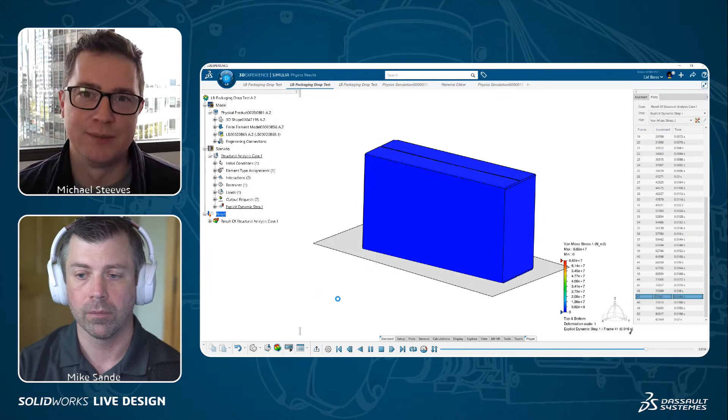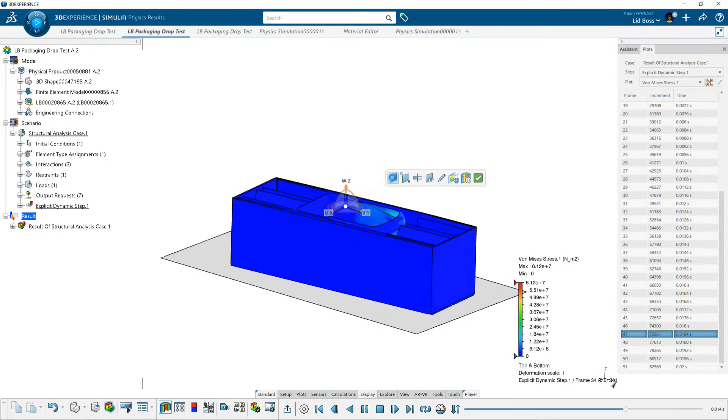Yeah, so really leveraging revisions. Now we can even do a design comparison, side-by-side look at these two, see which one is better and see how they improved. So I think we do the comparison of the accelerometers in the video, so we'll drive people to take a look at that. Really cool. All right, so let's do a cross section here. Let's see how well these guys compare.

So again, the idea here, we're trying to take that impact load and channel that into the cardboard and around that primary base unit that has all of the mechanisms. There's 4 different servos inside of there, a PCB inside of there. So we won't show the sensors themselves, but those little virtual accelerometers actually show how incorporating different materials, different structures in the packaging can reduce the amount of acceleration at certain critical locations of your design.

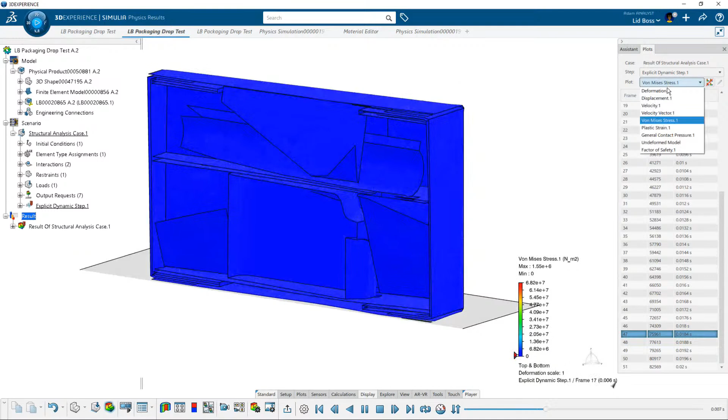Man, I love this animation. I could watch this all day. Someone said earlier, like, "Oh, I love all the colors. Just love it." Yeah, Juan, you nailed it. That's so cool.

Yeah, so we can take a look at velocity, accelerations on these color plots. I mean, yeah, you could get lost in just watching these results for sure.

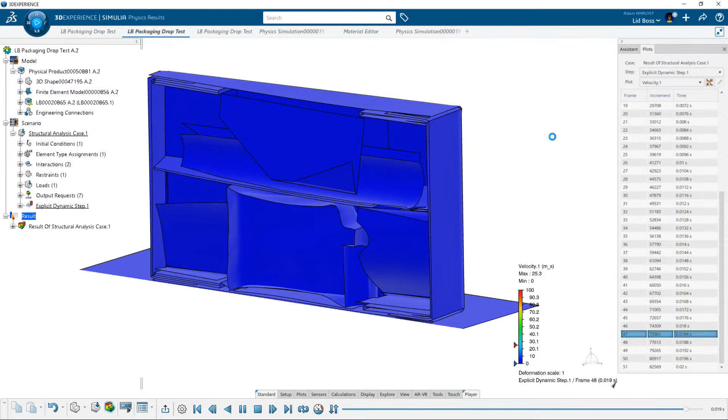But we were able to talk about what went into creating this real world simulation, the different nonlinear materials. Talked about leveraging the power of the cloud for solving.

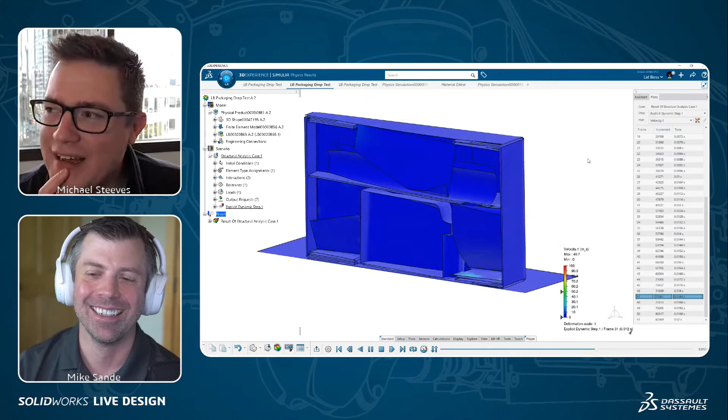Oh, one other thing that people are going to be able to see in the videos is when you submit a job to run on the cloud, and this actually happened to me when I was setting up this demonstration. Wait, did I forget to set up? Oh, your opening video. We didn't go back to your whole explosion mess. Yeah, did I forget to set up a boundary condition? Did I accidentally move a decimal point in the wrong place? Because that's what the first analysis that we started here was. I think I had a decimal in the wrong place.

Man, could you imagine doing a physical test and that actually happening? Be like, whoa, I definitely think we're living on a different planet right now. This doesn't look right.

So you see the validation as it's going through the study. You can start to see like, oh man, I got to stop, not waste the time, come back and reinvestigate.

Oh, I'm happy that's not what the Lid Boss packaging would do. Oh, I know, right? No, this is international shipping at its finest, I'm sure.

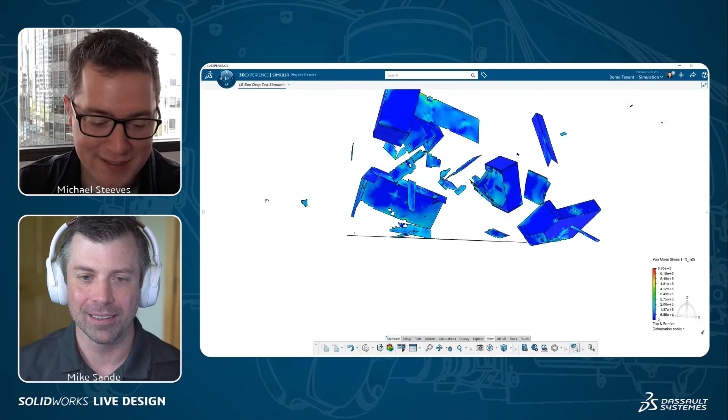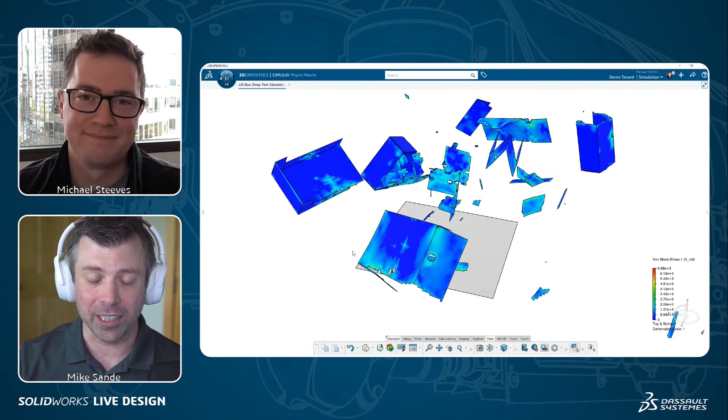Well, this was a lot of fun to help share some more of the behind the scenes of the simulation setup. So I hope everyone enjoyed it, and looking forward to the full Lid Boss story. I worked with you through this project, and I learned a ton today. Michael, my passion and background on the sim side has still been on the desktop. I haven't had the opportunity to work here, and watching you go through this, it's not scary. I hear about Abaqus, and I think of these PhDs locked away doing these crazy high-end simulations, and you watch through the workflow. You've got the simulation checker on the right, where it gives you the green checks and walks you through the process. Everything inside of the tool definitely is user friendly.

So if you're new to simulation, you've got SolidWorks, check it out. And if you're using it and you want to get more involved in some of these higher level studies, the Simulia tools that we're seeing here today are available. You can use them today. Check them out. Work through your reseller to get a license to access them. You can plug through them and start getting studies run right away.